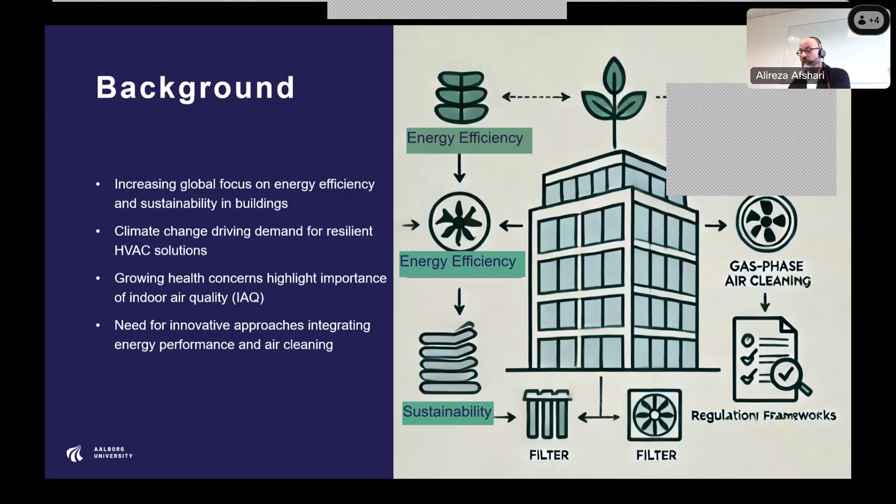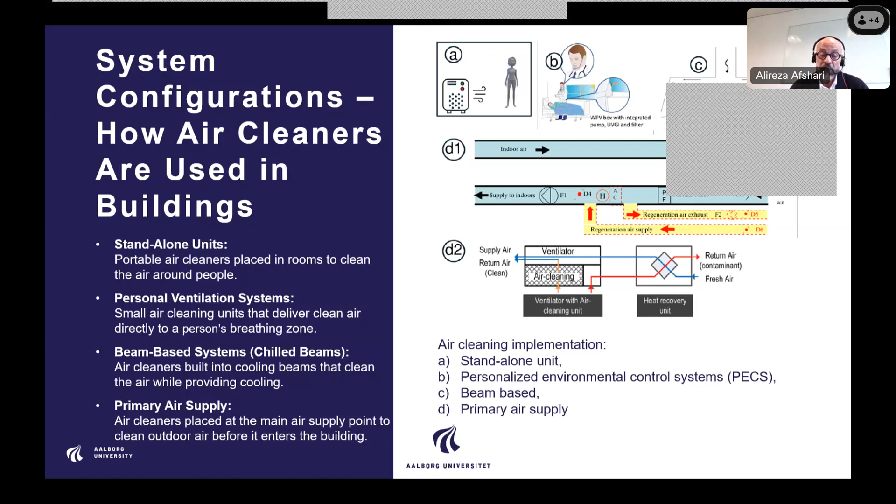About the technology regarding the air cleaner, we have the activated carbon filter, which absorbs gases and odors effectively for VOCs, and we also have photocatalytic oxidation, PCO, which uses UV light to break down pollutants. We also have air ion generators, which release ions to neutralize particles and gases. And we have UV-based air purification that kills viruses and bacteria. In addition, if you mix several technologies, you have a hybrid system, combining multiple technologies for better performance.

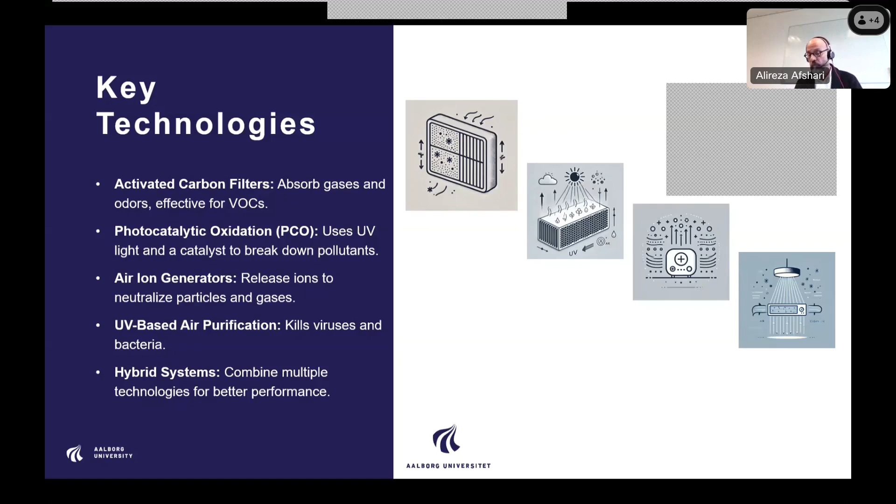The key finding from Annex 78, Professor Bjarne already talked about it, but in general, we have shown that gas phase air cleaning technology can reduce heating energy demand while maintaining indoor air quality. One study from KTH used recirculation rates of 20%, 40%, and 60% in an office with a heat recovery system, and this led to 8%, 16%, and 24% heating energy saving respectively. In residential buildings it was a little bit different: the impact of air cleaning without heat recovery was 3% saving per 20% recirculation of the air.

The study that I did during Annex 78 was that we integrated the air cleaner into active chilled beams, and this gave a primary energy saving of 26%. And there was another study that looked at different countries, in Copenhagen, and energy saving was observed across different climates. For example, Copenhagen was 9 kilowatt hours per square meter per year, and Tokyo was 5 kilowatt hours per square meter per year.

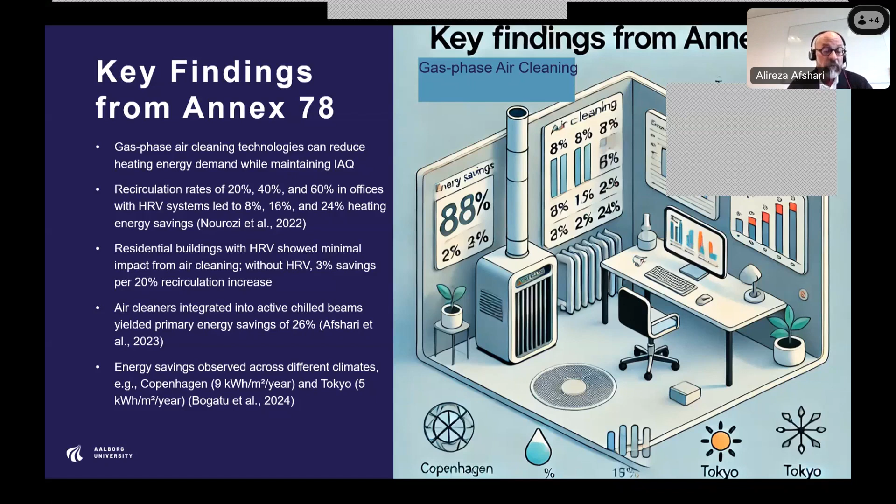Regarding the technology readiness assessment, early testing under Annex 78 tested gas phase air cleaning systems to see how well they reduce energy use and maintain air quality. It worked in different climates; I already mentioned it was in Copenhagen and also in Tokyo. And we also focused on efficiency measures: a new standard, clean air delivery rate per unit of energy, is used to evaluate how efficient air cleaning systems are.

One very important thing is balancing energy efficiency and indoor air quality in buildings. Finding the right balance between keeping the air clean and saving energy is a challenge. Why does it matter more now? From the climate change point of view, more heat waves, wildfires and extreme weather events make it harder to maintain a comfortable and healthy indoor environment. From the health side, the pandemic and concern about air quality have made it clear that buildings need better ventilation to reduce the risk of spreading diseases.

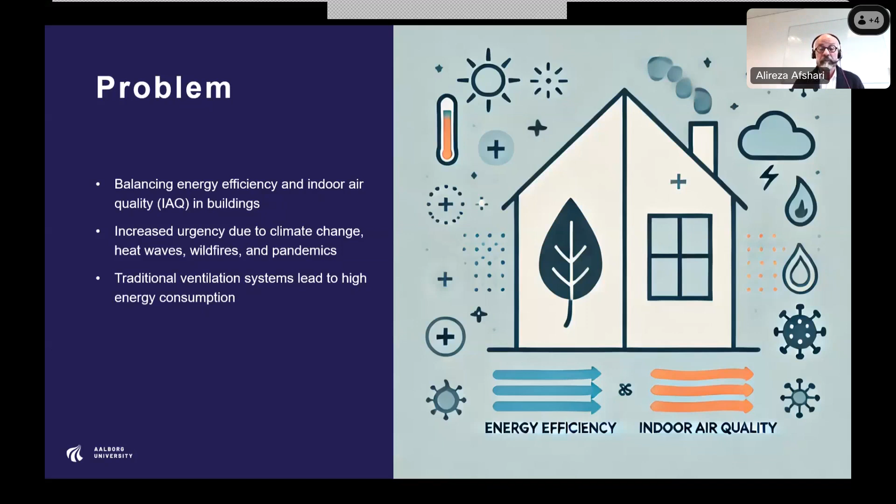Okay, so about improving indoor air with advanced air cleaning: buildings need cleaner air, but bringing in outdoor air, as I said, wastes a lot of energy. So gas phase air cleaning technology helps clean indoor air without needing as much outdoor air. The key technologies are activated carbon filters, which trap harmful gases and odors, photocatalytic oxidation, which uses light to break down pollutants, and air ion generators, which release ions that help remove particles from the air.

How does it work? The air cleaner works with a mechanical filter. You need a mechanical filter behind every one of these gas phase filters, so we have to make a combination. One reason is that you can reduce the particles, and the gas phase filters remove the gases. They reduce the need to bring in outdoor air while keeping indoor air clean, helping energy saving and removing pollutants from the air.

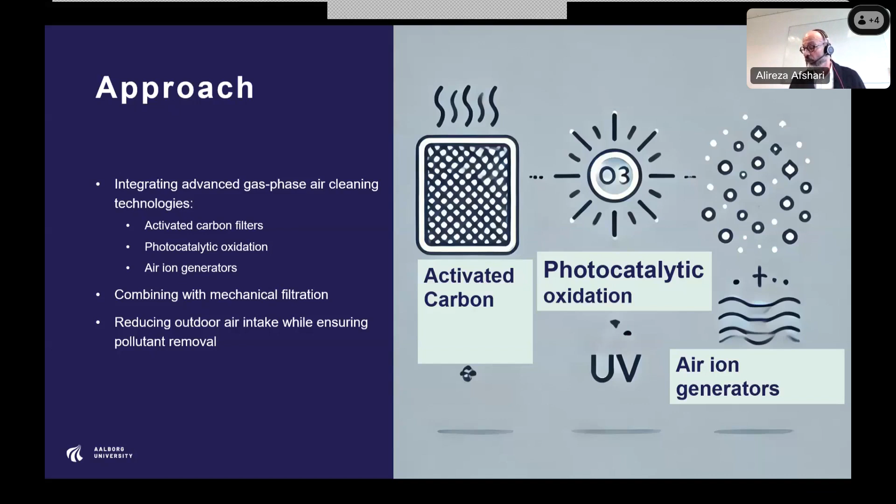Despite the fact that we decided during the Annex 78 to focus on criteria, we need to look much more at other things, like the environment and things like pandemics. We need to look at these parameters holistically in this new project. Standardized performance metrics, that I have already talked about, and evaluate energy saving potential during overheating and climate events, and conduct field evaluation and real world case studies.

We started with this part during the Annex 78, but we need to have really long-term measurements so we can see how the filter changes and how the filter will be influenced over the long term. And in the end, we need to focus also on supporting the regulatory framework.

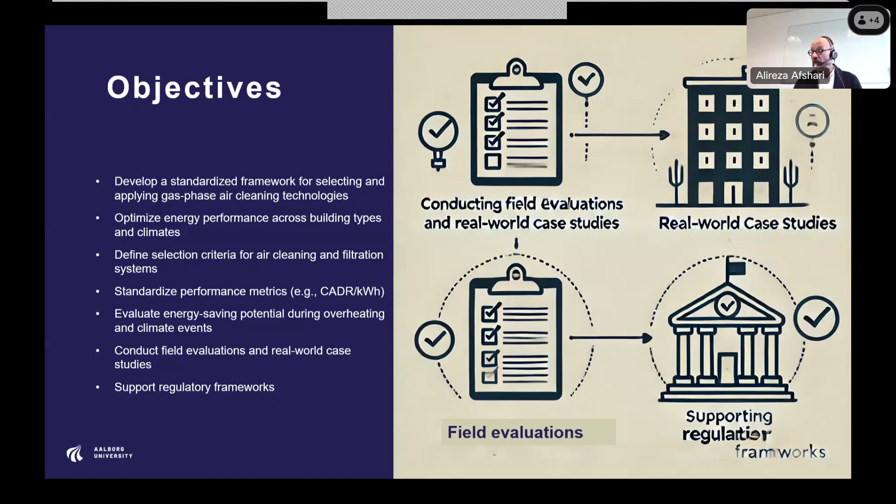So the scope is focused on office buildings and residential buildings. We can also look at schools and other educational institutions, because during the Annex 78, we found that heat recovery plays an important role for residential and office buildings. So in the future, in addition to the different kinds of buildings, we need also to look at with heat recovery and without heat recovery, and develop in depth what happens.

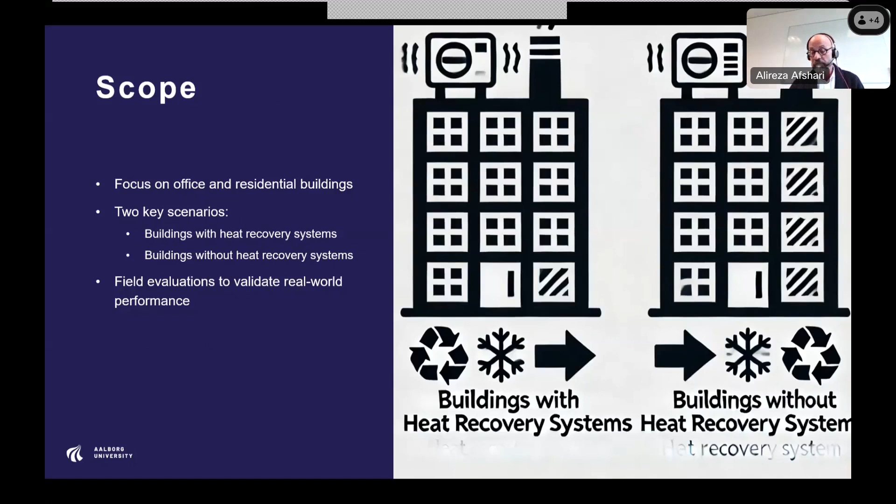As I said before, a very important part is the long term, because you have a mechanical filter and you have also the chemical or gas phase air cleaning. So they have to go hand in hand, and we can see what happens during the long term. So actually we shift towards energy efficiency improvement, investigation, also cooling, energy recovery. Because when you have recirculation in the room or in the building, there are opportunities to save energy from the cooling point of view, combining air cleaning and filtration as an integrated strategy.

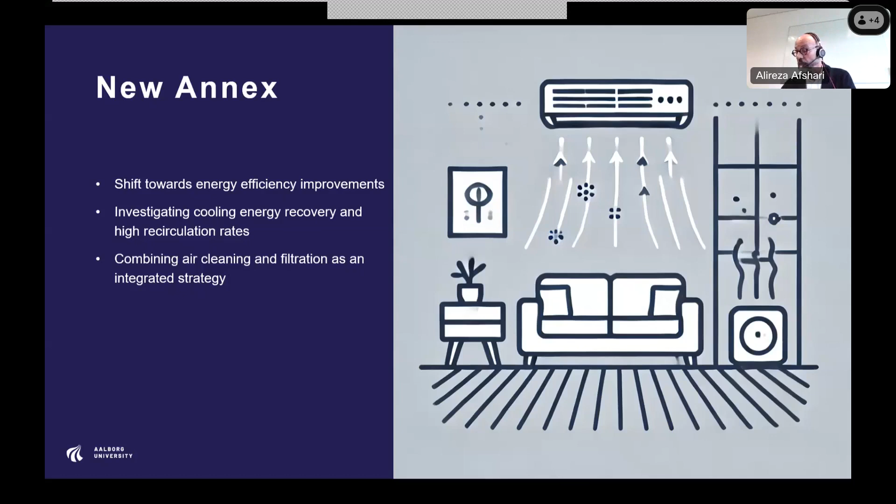So, how we study and improve air cleaning systems: as I said before, testing in real buildings is very important. So we gather more information regarding that, and I hope for the new annex we have opportunities to focus on this part and see what happens. In addition, it is important that we check how much energy is saved and develop methods to measure this in an accurate way.

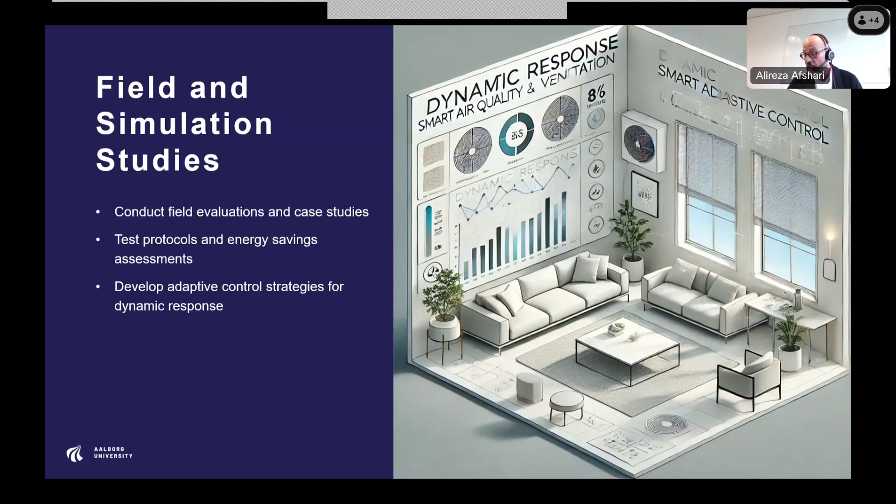And one of the important parts in this new annex is smart controls. We try to find a project that has created a smart system that adjusts air cleaning and ventilation based on air quality and energy need in real time.

The target audience, I mean, who will benefit from this work? Policymakers and regulatory bodies. They can create better rules and standards to ensure buildings are energy efficient and have good indoor quality. HVAC engineers and building designers, they can design better ventilation and air cleaning systems that save energy and improve air quality.

Energy consultants and facility managers, they can find a way to reduce energy costs and improve air quality in the buildings they manage. And sustainability experts, for example, they can ensure that the air cleaning solution helps reduce the environmental impact of buildings. And in the end, researchers and educators, they can study new technology and teach others how to design energy efficient, healthy buildings.

Relation to the EBC Strategic Plan 2024-29: the new project will be aligned with the goals of the Energy in Buildings and Communities Strategic Plan, which focuses on improving energy efficiency and indoor air quality in buildings. So the key innovation will be combining air cleaning with HVAC systems; integrating air cleaning into the ventilation system helps reduce energy use while keeping indoor air clean.

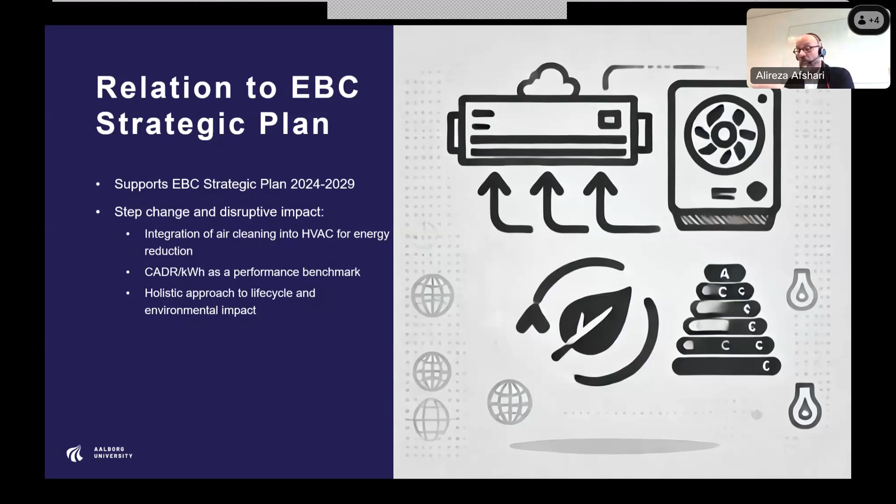What we need for the new project is experts needed for the success. We need gas phase air cleaning specialists. We need life cycle assessment experts in this area. We need regulatory analysis, and we need data and artificial intelligence professionals. We need cross-disciplinary experts.

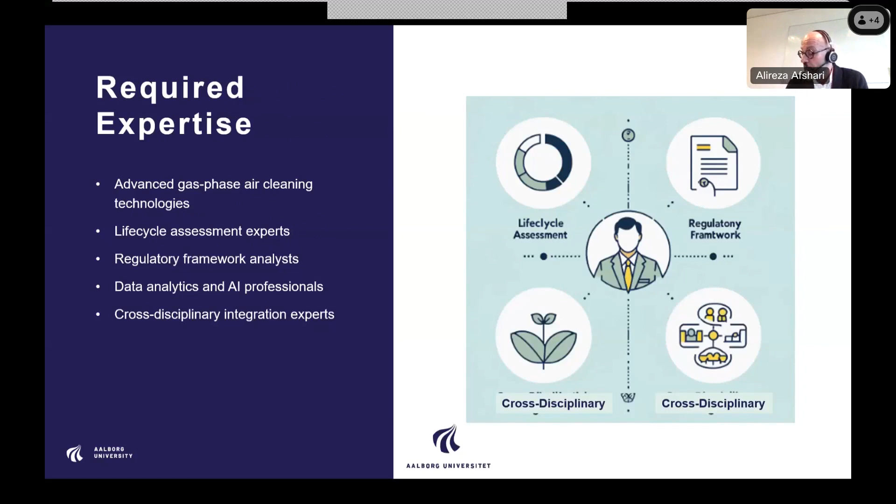For collaborating organizations, we already started talking with DTU, and we already submitted a proposal to the ExCo committee in collaboration with DTU, Bjarne Olesen and Pawel. In addition, we need also HVAC manufacturers and technology developers. We are going to contact them in the future, and we need also people from government agencies and policymakers. And we need also non-governmental organizations and sustainability certification bodies. For example, if we can involve the World Green Building Council, it can be very good for the project.